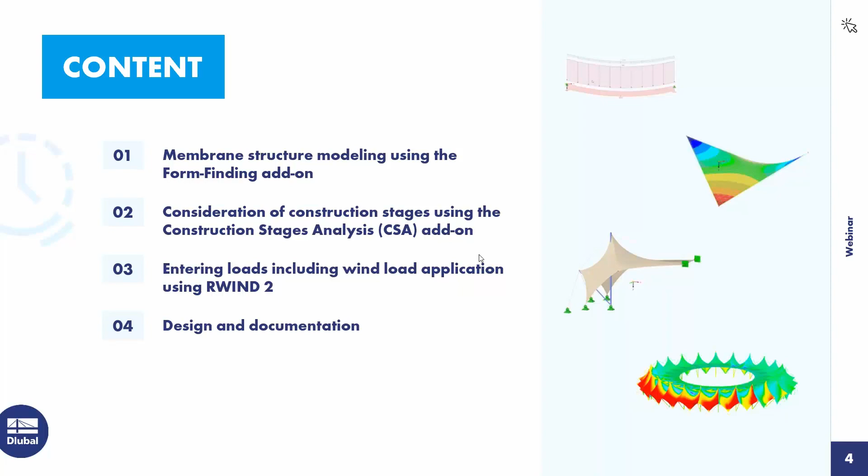Okay, thank you, Andreas. Then I take over and start with our webinar about the technical part. Today I want to show you how we can deal with membrane structures in our new generation of RFEM 6. For this we planned 4 main points we want to show you. At first, of course, how you can model form-found shapes and work with them in the program. Then how we can organize these shapes to each other with stages. And as third, how we can create wind loads according to a CFD analysis on the structure. And finally, how you can design and document such type of structures.

Of course, I can't do this completely for one project in 1 hour, but I want to give you an idea how this is working. And you see on the right side some pictures from top to the bottom. Because the new generation has a new input concept for these tools, I want to explain this to you on an easy, simple example on a cable at first. Then we go to a hypar surface structure, and afterwards we use all these functions I explained on a more complex structure for such a stadium segment, and finally we take care about wind simulation on the complete stadium model, what you see on the bottom.

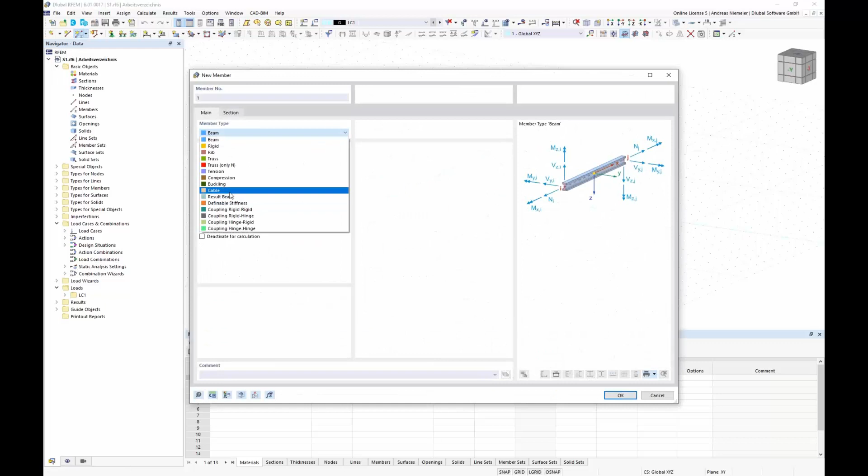I use a new member type cable with a cable cross section. Let's select one from the library, for example, this PE cable with a PE cable material with the equivalent stiffness, and define here a cable with the length of 10 meters between 2 points. So that the cable will not fly through the air, of course we have to define some boundary conditions, therefore I define here 2 supports. Now, this is the input for the model. As you see, a simple cable, and on this structure we explain now all features.

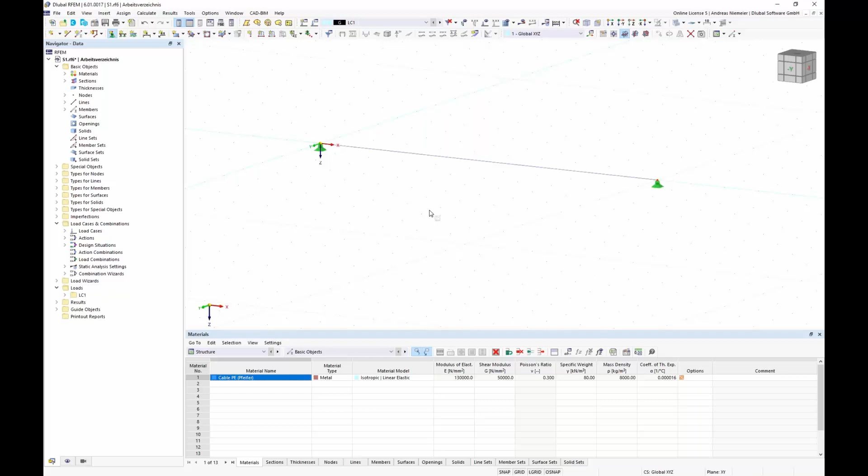And of course what I always do when I explain form finding, I calculate the deflection of this easy example. Therefore, let's calculate the self-weight load case, which is always defined automatically in our program. If we run the analysis of this load case, we will get from the program, as expected, a deflection curve. Here you see 66 millimeters sag. Of course we can scale the deformation manually. We can animate it, and of course when I scale it to 1, you will see that the deflection curve will lie on the topology shape.

And this is maybe the first point I want to mention. Here in our new generation we have programmed an intelligence that draws the topology, so the cable structure in this case, on the deformed shape, in this case with a sag of 66 millimeters.

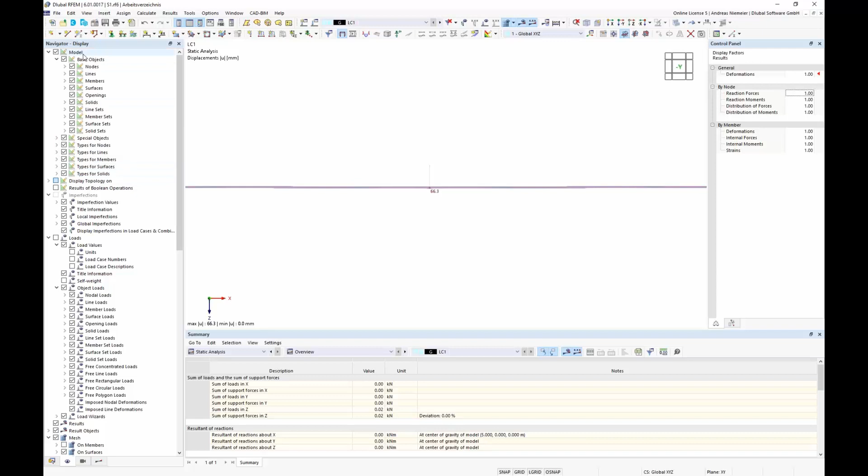This you can change in the display navigator below the chapter model: display topology on original shape and deformed shape. The same you can change here with this button, original and deformed shape. So this is a little change that should help to understand the model a little bit better. So, then let's go to the next topic.

Of course we calculated now the static analysis with the length of a cable of 10 meters and for the self-weight of the cable itself, which ended up in a 66 millimeter deflection with an internal force here of 0.33 kilonewtons. But of course it's too small a cable, one moment.

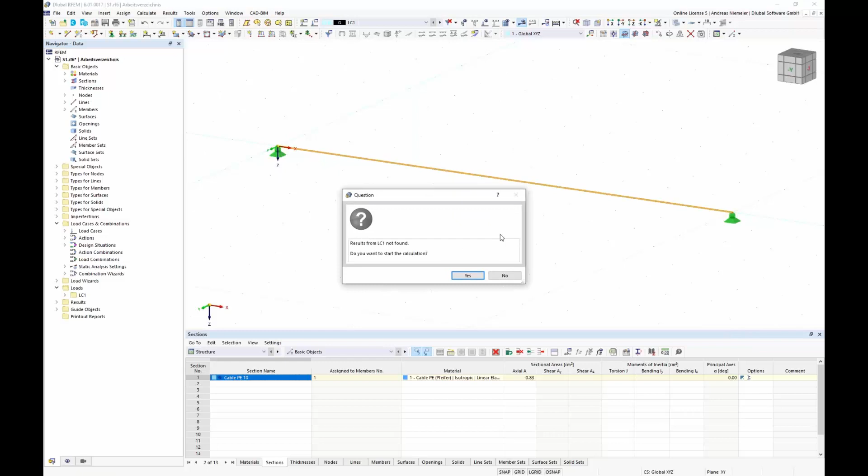Let's make it bigger now, because to show you the effects, I expect a bigger force here. Yes, 1.25. But of course, if you see the force here, you could say, I want to simulate in the program a cable with a longer length, so that I can reduce the normal axial force here. And this is possible with our form finding application.

For this, you have to define now, besides the self-weight load case, a pre-stress load case. I call it P and define here an action category pre-stress. This is now the step in our form finding tools. This pre-stress load case is now empty and should be filled with some boundary conditions, and we can fill it with the boundary condition for form finding.

We can go to the member loads, to load type form finding, and define here, for example, a geometric definition that we expect for a specific load a sag or a cable length of, let's say, 0.2 meters. And if we apply this load, you will see it looks like a line load, and it indicates that we get here 0.2 meter sag. And of course everybody could think now, it's defined, and if I calculate this load case, we get a sag of 0.2 meters.

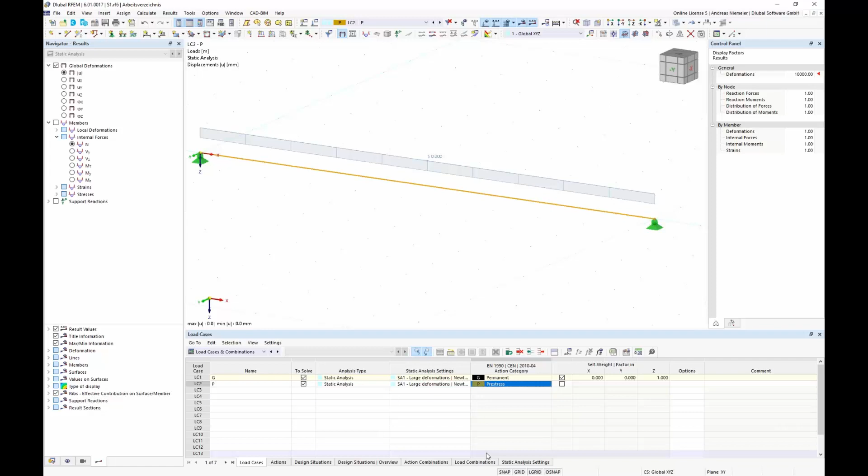In this case, if I take a look at the load case list, we can say, please find me the shape with 20 centimeters for the self weight, for example. It could be any other load also. But for this load, I have to go to the load combinations and define it. For this, I deactivated first the wizard and go to the load combination and say, please combine form finding with self weight. This means for the program, because combination 1 contains this form finding pre-stress load case and another load case, that this is a form finding job.

If we run this analysis, the program searches a shape which fits the conditions. It searches a shape where it can almost fulfill this condition of 20 centimeters with a corresponding force. Of course, you see here we don't meet the target completely. We have 213 millimeters and not 200, but this is a cause of accuracy. It's maybe the standard definition for a specific size of model. If you want a more certain result, you can change the properties of the calculation.

This leads me to the next feature, how this is organized in RFEM 6. We changed to the properties, and you saw we calculated CO1, and every load situation, load combinations and load cases, have a static analysis setting. That means I can assign to every analysis or load situation a set of calculation parameters. And these calculation parameters also have a form finding sheet where I can define these settings. You see there are fewer inputs.

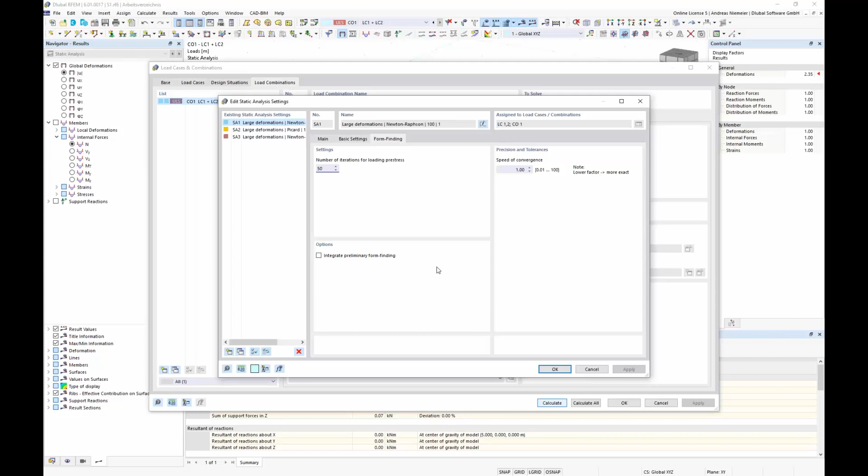We simplified everything a little bit, and I increase now the pre-stress loadings to 50, and after confirmation and rerun we will get the 20 centimeters hopefully, and yes, we get it. So you see the program found the shape with 20 centimeters with a corresponding force of 0.4 kilonewtons. So far this was our first form finding job in RFEM 6, and maybe you saw that we gave you as users a new mighty power in the program to work with shapes.

In difference to our old solution, we can now manage more shapes in one model, because I have it now in hand of combination. Before it was only one. And this means now, if you imagine, this is now shape 1, form finding 1 is G plus P, and you say, I want to check in my model also another shape. Maybe the shape should be based on a point load in the middle.

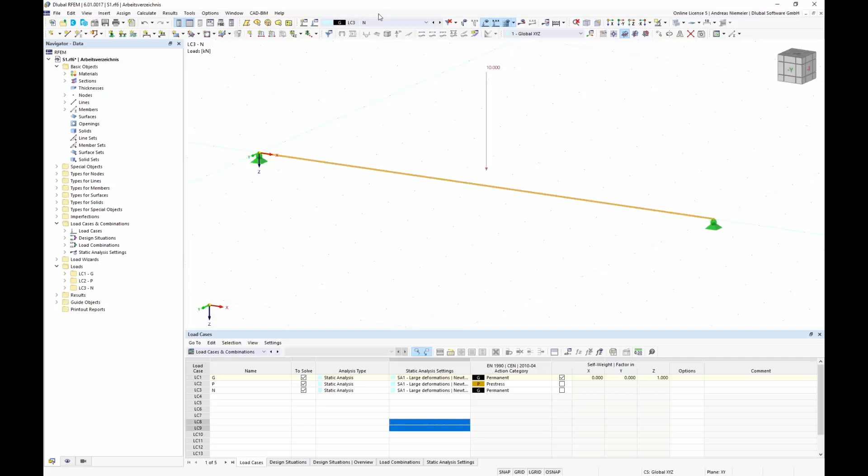So let's define here a load. For example, I call it N, and give this load case maybe the type permanent. And define in the middle here, let's say, a concentrated load with the size of 10 kilonewton in the middle of the beam, and place it here exactly. And now let's create a second parallel shape besides this self-weight based shape.

So I go again into this load cases and combinations dialog, into load combinations, and create here now a shape, maybe FF2, based on N plus P. And for this, we only have to change here the input, so P and N, in difference to the first one. And if we calculate this, you will see you can do in the same model another shape.

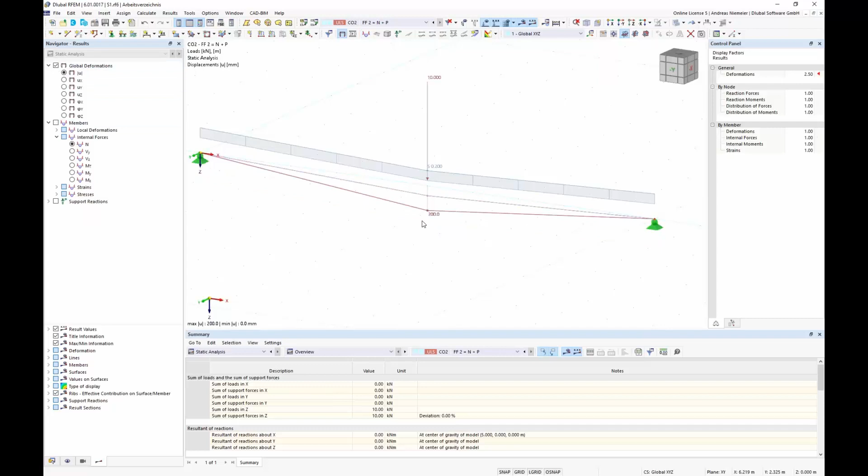That means we have the 200 millimeters in the middle, but if we take a closer look, you see according to this form finding load in the middle, this concentrated one, we get such a triangle shape with a corresponding force. And you can change in between both shapes. So this is now possible and gives you much more options to check your models or to create something new. So this is one point I wanted to show you.

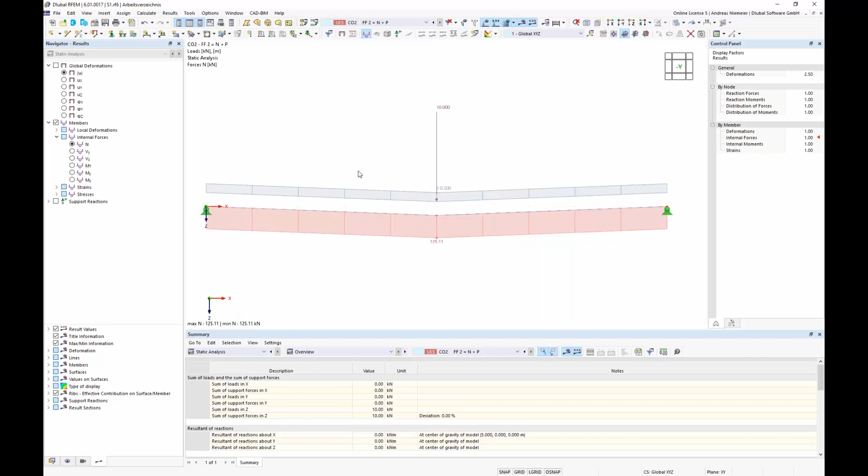So the next point was, and I remember many questions on the support, how I can deal with partial safety factors in the program. Do you have a solution for it? And with the new generation, we want to give you a solution. So I can say, of course, we can create a third shape. For example, I copy the first one and say, let's scale it up and define here 1.35 as factor,

and so that we have a clear name, 1.35G plus P. And if we calculate this, the program knows I have to do a form finding with the form finding condition of 20 centimeters. It was not scaled up, but with a bigger self-weight load scaled with 1.35, therefore we get a little bigger force on the cable, not 0.4 and 0.56. And you see the program is ready for this.

Of course we can also, let's say, scale the pre-stress. That means I scale the pre-stress 1.35, and only for the name here, 1.35 form 4, for example. This was form 3, only that we have a clear description, and calculate. Then we can also scale the form finding inputs. You see now 200 and 270. That is the factor 1.35 in between, with the corresponding force again. So it's an easy game to work with different shapes in one program now.

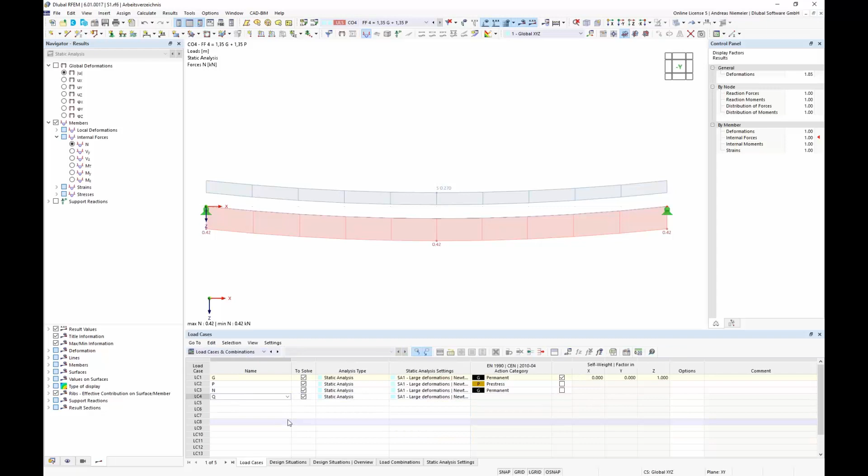And this brings me to the next topic. What happens if you want to use these defined shapes for further loadings, maybe self-weight, snow, whatever? And here it's interesting, you have to organize now which shape should be used for which load case. So define at first some additional load. I define here, for example, a variable load with any category. Let's take, for example, this red one. Now apply, for example, 5 kilonewton per meter on the structure here with a projected load.

So far we have a load on the structure. If I run this load, what happens? Without any further specification, the program applies this load on the 10 meter long cable, and not on any shape. But if you want to apply it maybe on shape 1, you have to assign it.

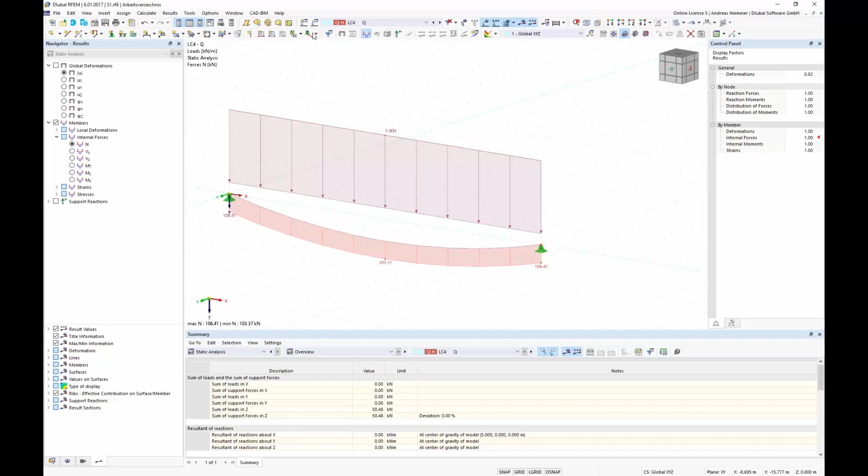This means we go again into this dialog, load combinations, and say please calculate. We give a name, Q on FF1. And this you can do if you define an initial condition or an initial state. So here you specify the shape, for example shape 1. This means we take over the geometry of the mesh and the inner forces, and to get a full set of calculation we apply also the outer loads.

Form finding loads and the expected, let's say, additional load. And now, according to the situation that we have here defined an initial state as starting shape, the program knows that this is no form finding job and only a pure static analysis job. And let's calculate this and take a look how this is looking.

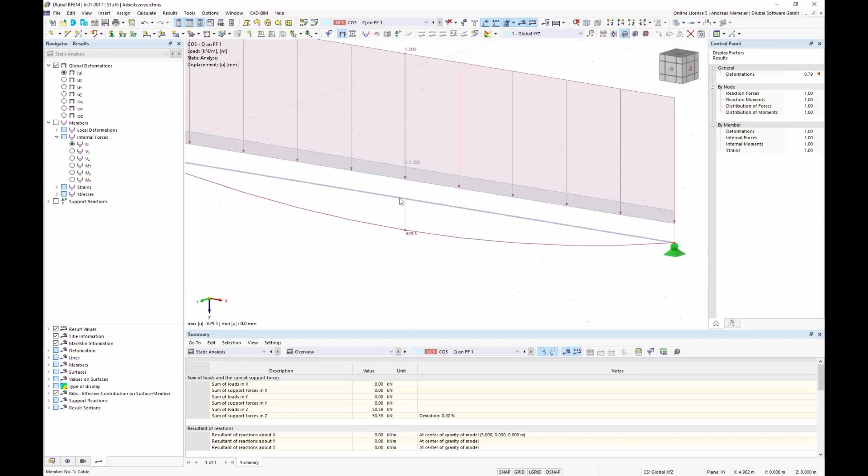And you see, when we take a look at deflection, we have now a deflection of 629 millimeters, and this means starting from the original shape. So this is what we inputted. This is the shape of the initial state. This is our form finding shape, and this deformed shape is the loaded form finding shape.

So the program gives you the option to manage all this stuff, and of course not only for one shape, and if you wish you can also apply the same load on shape 2, which means we only change here to shape 2 and exchange here the load. And with calculation we get the same task, only on, let's say, the original form finding shape 2 plus load, a deformed shape with 493 millimeters with a normal axial force of 177.

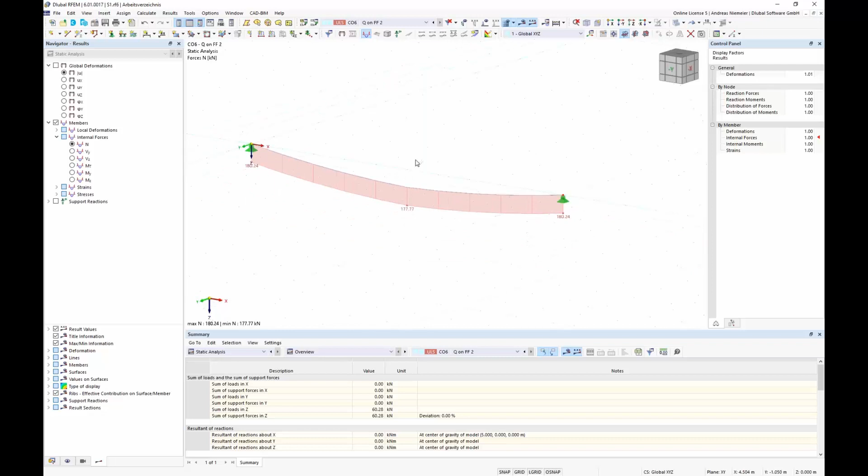So this is, let's say, our new philosophy of working with form finding tasks and organizing it in the program. And this brings me to the next point, how we recommend the standard use of these tools. If you are starting with a new project, of course you don't want to test it like I just showed you. On a real project I recommend, and for this we create here a new situation. So I delete all this stuff, go back to load cases, and let's remove this stuff.

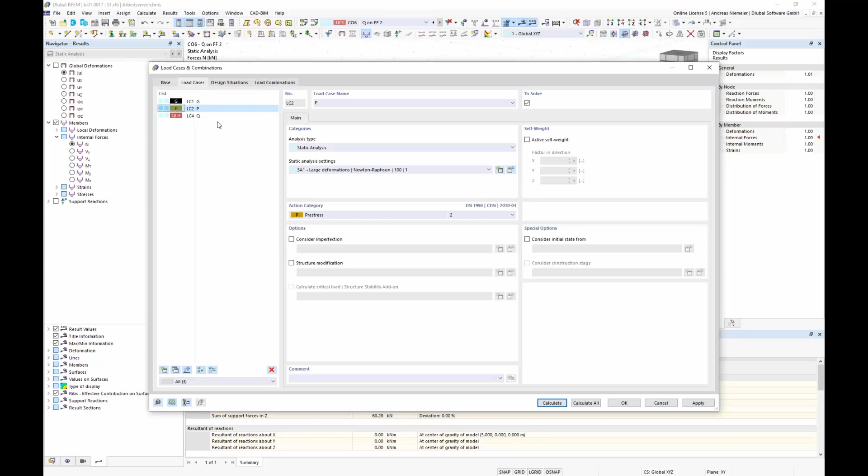And now we have these 3 load cases, a standard situation, and in a standard situation I recommend that you use the combination wizard and say please combine all these load combinations automatically. This means the program takes over all this stuff, but has to know what is my shape. And to define the shape for the program, we create it here as an individual load case. So we select both, for example P and G, add it, and say this load case is shape 1.

And now we give this shape 1 the pre-stress load case. Now you see we have 2 pre-stresses in it, and we only have to use 1. So I teach my action set, pre-stress, that the shape is not needed, we only want a combination with P, and go to the design situations and tell our combination wizard, if you combine something, please consider always shape 1 or any other shape. Of course we have to use Newton-Raphson here.

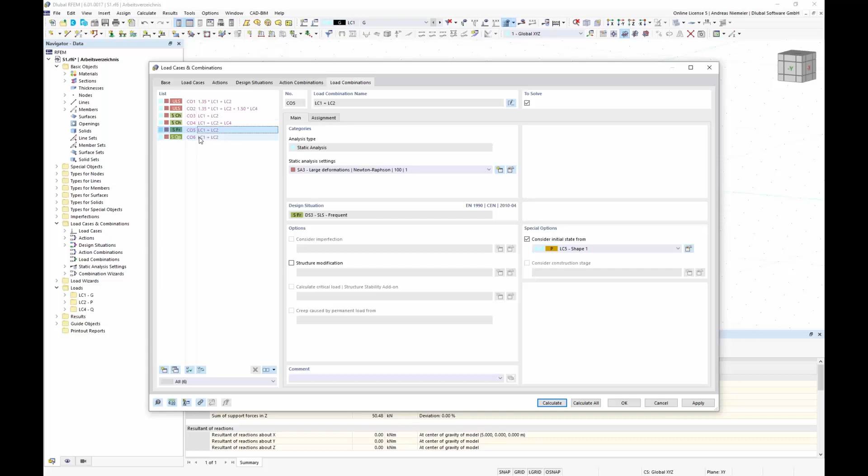So now if we go to load combinations, you will see the program combines for us all combinations according to the rules of the standard, so ULS and SLS with factors, without factors, and you see in all combinations the shape 1 is automatically assigned, and all load cases, the external loads, are also placed in the combinations. And with calculate all, you get all forces that are expected in this case. At first it calculates the shapes and then it sets them up.

So this is maybe the first introduction example that shows you how to work with all these tools in RFEM 6. Of course this is a special example because the shape for cables always depends on the form finding condition, so how big is the sag, for example, plus any load for which we have to detect the shape, the self-weight, for example. But there exist different examples.

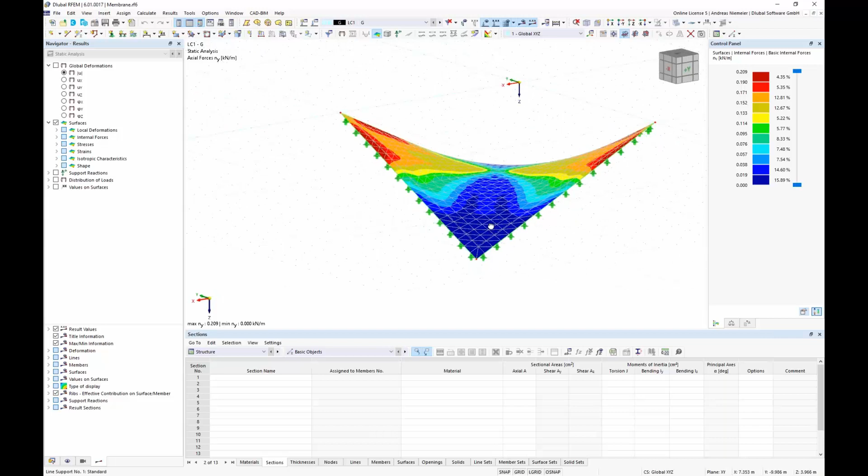Maybe the next is here, desktop, a surface structure, a membrane structure. And I prepared this example only to show you it could also work like this. So in this case we have such a sail with typical load cases, self-weight, pre-stress and snow load. For self-weight, clearly the weight coming from the material itself.

For pre-stress, we defined here, you see, the inner pre-stress, the membrane tension, by a surface load, like we just did for members, with load type form finding, and defined here in X and in Y 3 kilonewtons per meter. And you see, if you're running this form finding job, you get here the shape of the membrane, you get internal forces in the membrane which almost meet the defined 3 kilonewtons.

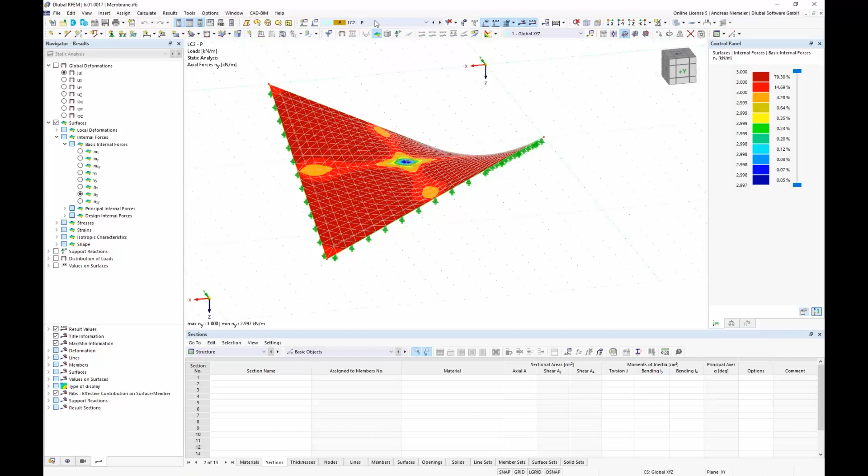And if you want to combine all these 3 load cases in combinations as the standard recommendation, you go into the load case and combination menu, define the combination wizard setting, which is on by default, and teach the wizard: please always assign the initial state, the shape from load case 2. Not more. In this case it's enough.

And if we go to load combinations, you see the program assigns even for this surface structure this shape from load case 2. And if we run the analysis, the program uses this shape and detects the forces. As you see, now if we go to the characteristic solution, we have here shape plus self-weight.

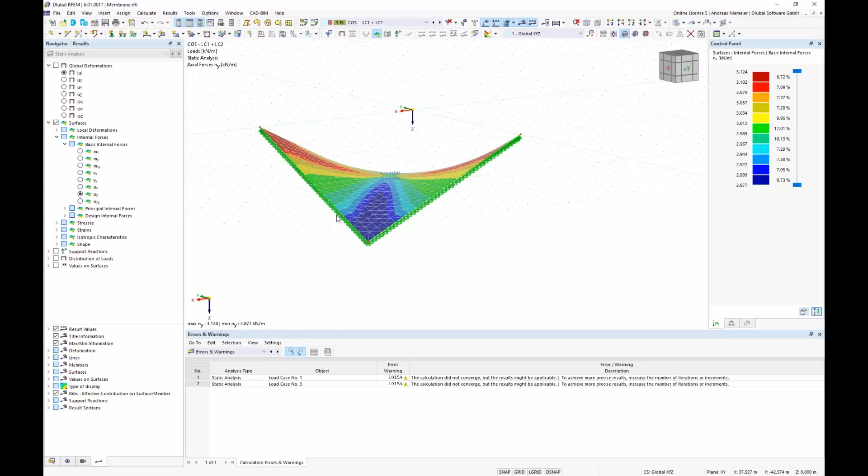It's not almost 3 because self-weight is applied afterwards, and if we apply maybe even the snow load, you see the forces have bigger changes because the load has an effect on the given shape. So even this type of model is possible in the new environment.

Now we learned that we can use pre-stress load cases with form finding loads to find shapes, to organize shapes, to assign shapes to load situations. I want to go the next step and say it's even possible to use shapes based on another shapes.

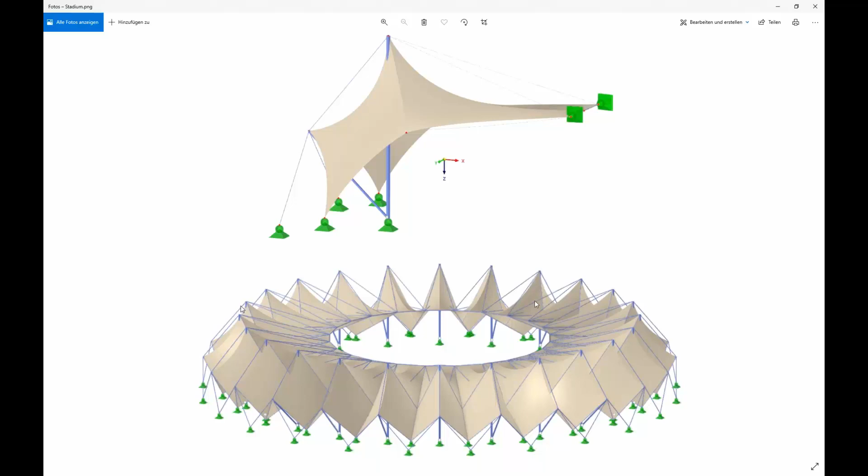So let's go back to RFEM. Open a new model, I call it S2, and define all tasks needed for modeling this part of the stadium.

I go to add-ons and say please use form finding. Because we have these different stages, primary and secondary, I activate construction stages and go in. Of course it exists, so overwrite it.

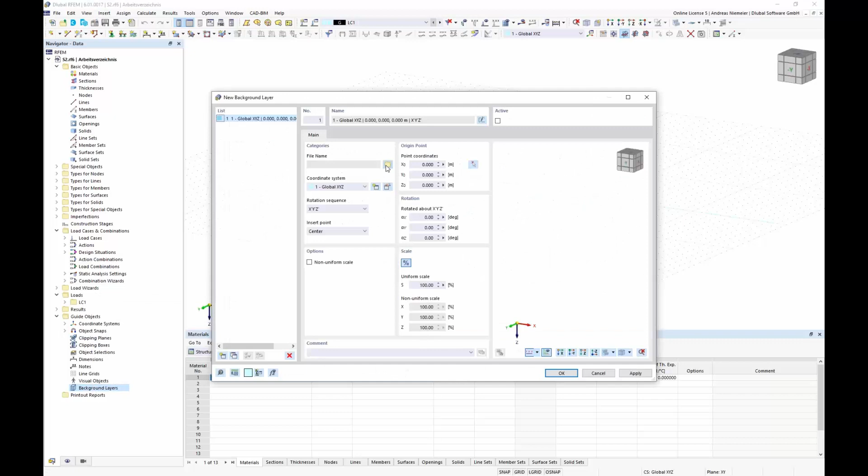Now let's start. Of course it's not easy to model a whole stadium or a fragment from it, so I prepared a DXF background layer. I go to background layers and import here a layer from a DXF file called base.

You see this is my DXF data. It's on the wrong plane, so I rotate it 90 degrees and then by 180, and then everything fits and we can take it over. Please take care that it's activated, so active.

Now we have this, let's say, basic geometry in our program. You see on the bottom there's a tribune only for imagination, and then you see here this main element is for primary structure, and then the membrane for the secondary structure. At first we model primary, take a look, and then we add the secondary part.

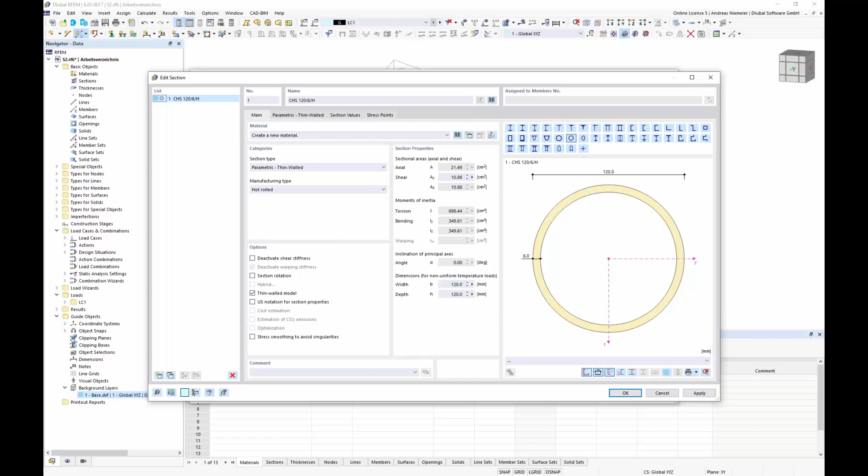So let's start modeling these members. I go to the member dialog, member type beam. Let's select a section. In my case here, because I don't move the section, my proposal is to the final state, but here I would select a diameter of, for example, 1000 millimeters with a thickness of 10, and a material of maybe S355.

So let's go to steel according to Eurocode. Select here standard according to Eurocode, this one, and select the steel here and go. Now we can place this column here in this structure, from the bottom to the top.

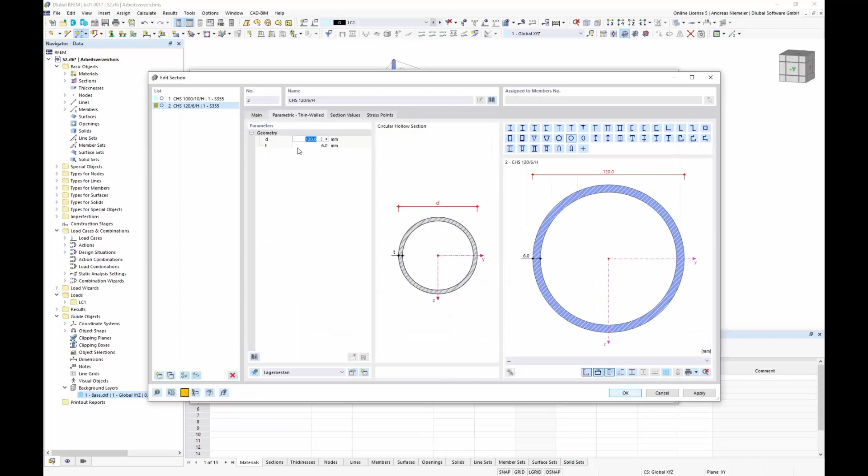And let's add here a bracing member that is connected hinged on the bottom, so if I activate the hinges, and here you have a different cross section, for example 600 millimeter diameter with a thickness of 10. Of course this could be optimized according to the section proof afterwards.

The hinges should be hinged on the bottom, so define here hinges about Y and Z, and now we can place here the member between these 2 points.

This structure will not be stable, so we have to use now stay cables on it. The stay cables are acting now on the outer fraction of this segment. At the moment it's only a slice, but it will be a 15-degree segment, so we have to create it.

For this we need a center point of our structure, so because I know here the diameter of the structure is 288 meters, I copy this node 144 meters to the middle.

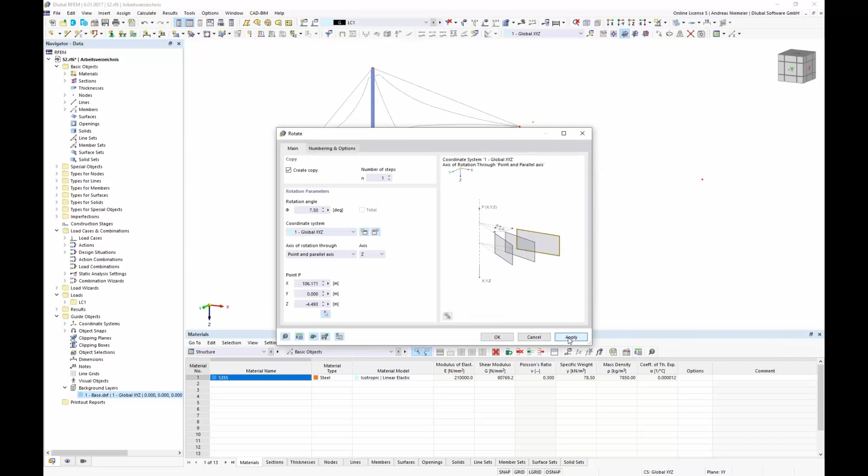And this is now my center for all rotations, and we can create from these nodes now the outer points for this segment. So I select these 3 nodes, rotate it by 7.5 degrees about the global z-axis around this point, and apply, and now minus 15 degrees and OK.

So now we get these outer nodes. When we take a top view, you see this is maybe the geometry of this 15-degree segment. And now we can place the cables, which means the uninteresting nodes we delete before.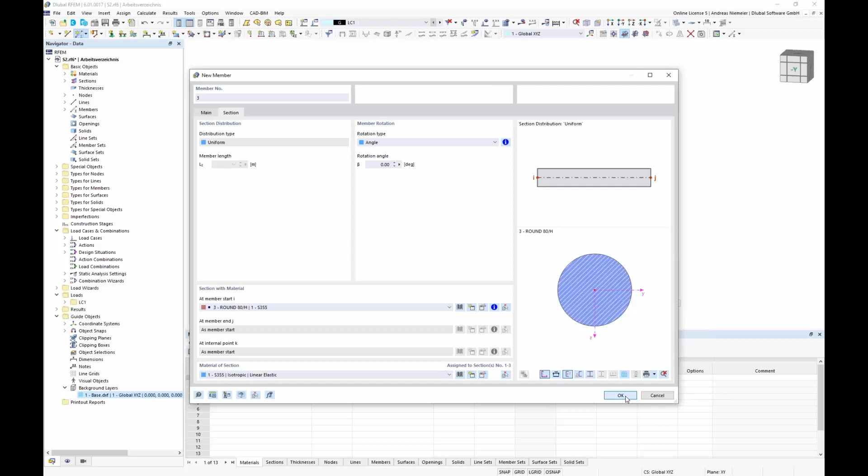Go to the new member function, use a cable, and select equivalent sections with an equivalent stiffness. For example, here a solid section with a diameter of 80. Now we can place it here and here, and now to the top.

Now we need maybe some suspension cables to the front. Here we have a different diameter, so it's a cable at least. We use here a solid section again with a 30 millimeter diameter, and then we can connect maybe the peak point or top point with the front points, and maybe make some stabilizing cables back to the back bracing.

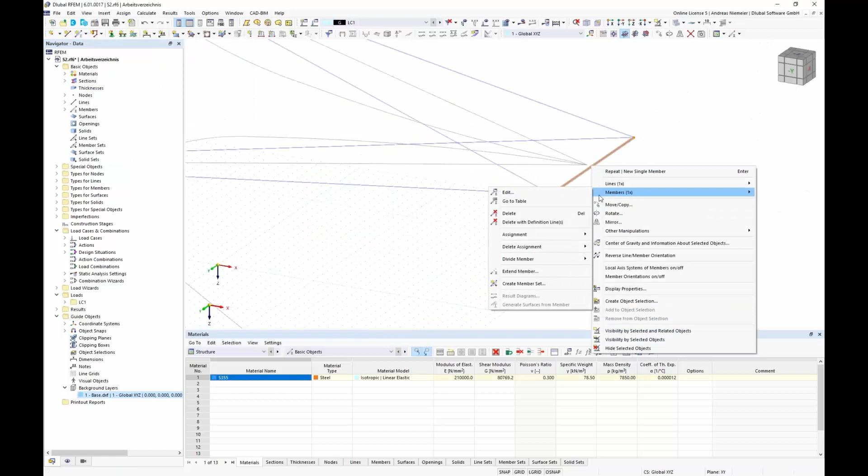So this is almost the primary structure for the stadium segment. The only thing missing is the tension ring around the structure. Let's add it. We take here a cable with a section, and maybe here need some more mass, for example 120 as equivalent section, and connect both points and directly define a middle point, so divide the member for a later connection of the ridge cable. So this is now everything I have to define for members for the primary state.

So I deactivate the DXF, so you see what is left, and now we have to define the boundary conditions. Boundary conditions, let's say the easiest ones, are supports. So we define here a fixation, fixation, fixation, and of course this front point is not weak. We need a rotational symmetric boundary condition so that this is overtaking loads.

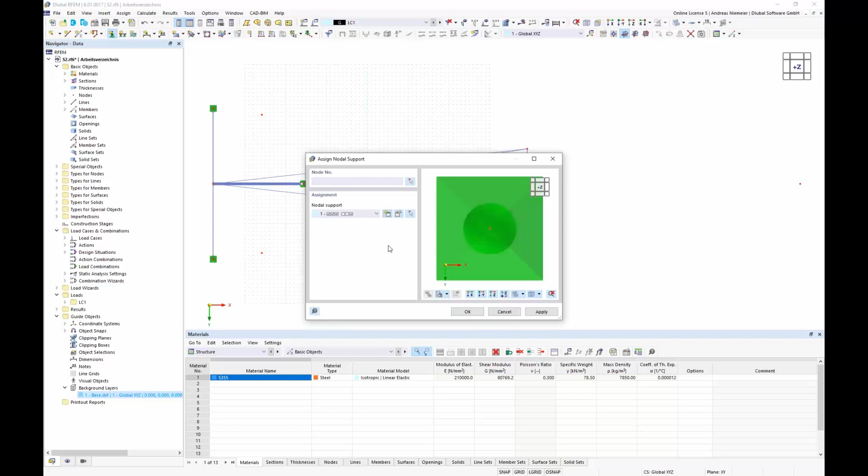So I have to simulate this tension ring around. For this I use also nodal supports, but I rotate it in the running direction of the cable, which means I fixate the degree of freedom in UY direction with a specific direction around 7.5 degrees.

Now let's copy it so that we have it also for the other direction with -7.5. And now we can start applying this support here, and the same for the last direction, and we get a structure that can simulate this tension ring.

So the structure itself is now ready. The only thing missing is the form finding conditions to find the right shape for this structure. And if we want to do something with form finding, we learned already we need a load case pre-stress. So this is G, permanent load case, and here we need a load case P, pre-stress, for defining these form finding conditions. So let's do it like this.

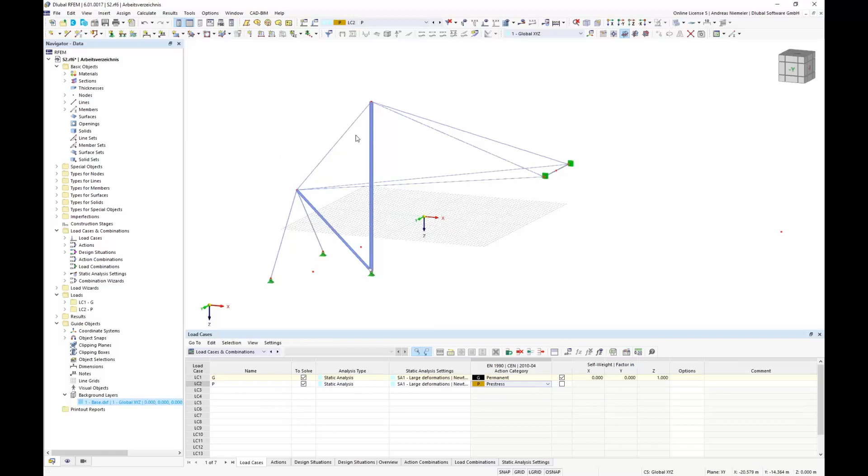This entry is done, and here define with member loads, type form finding, geometric definition. So you see we have different options: geometric definition, force condition, but in our case in this type I would say generally he should find a shape with the original length of the cable. So I define geometric length by 100% and apply this on all cables.

In the construction stages we can define now a stage, primary, or not primary, let's say shape 1, it's easier to understand, and we say shape 1 consists of members and nodal supports. The members, I draw a window about everything, okay, and the nodal supports the same.

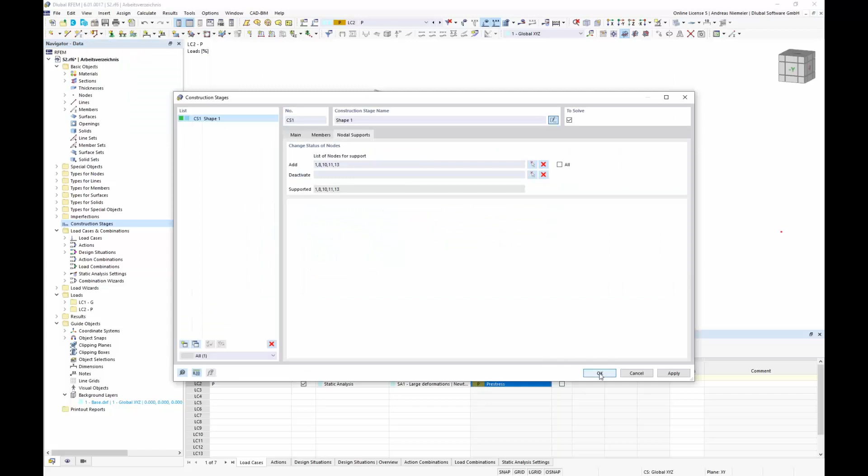Everything good so far. So the amount of elements is clarified in this stage, and the only thing missing is that the program knows he should do a form finding for this stage, shape 1. That means he should consider these load cases as permanent. And if we calculate this stage with this load selection, it's clear because nothing else is here, he can do a form finding for this type of structure.

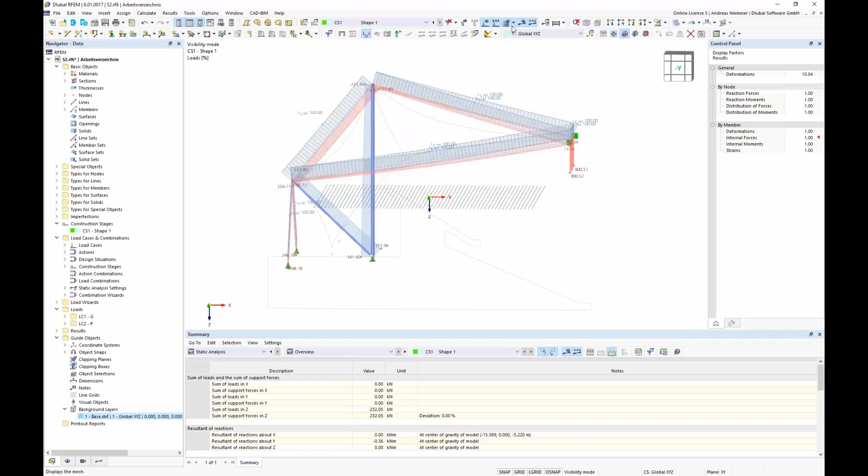We get small sags, we get forces, so everything is clear so far. The next point is to hang in the membrane, what I mentioned before. So if we take a look at the background layer and set it here, you see now we have to bring in the membrane on the already deflected and loaded shape 1. To do this, I delete the mesh and start modeling the rest. That means we define, for example, the boundaries of the membrane.

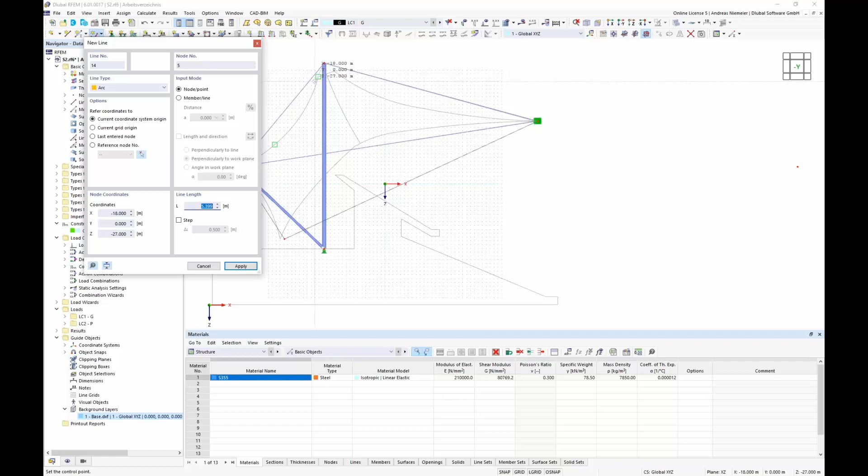I simplify this right now for the presentation and pick the line, same for this here. Of course it's not important if this line matches the DXF shape, because the form finding application itself will find the right place of the structure, so it's not a target, just a tendency of where it should go.

Now, not completely - we need a splice cable, so also define a splice, and if we want to define it on the perpendicular point, we can do like this. Now we can deactivate this shape.

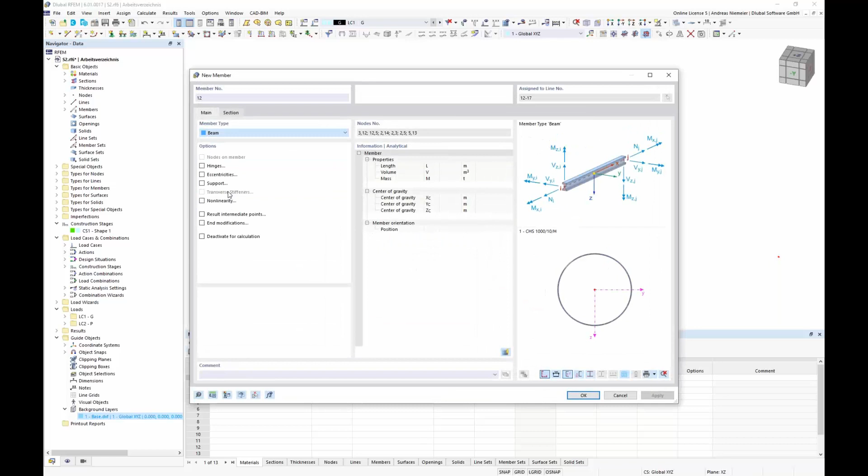You see we specified the boundaries for the membrane and can now support cables on these boundaries. So I select all these lines, go into the library, edit lines, and say these lines should hold some members with the type cable, and now define the last section, for example one with 20 millimeters.

So far it's good, and now we can bring in some membranes in these cable boundaries. Because this produces some non-plane surfaces, I select as initial shape a quadrangular surface with the type membrane, and go to the library. This is maybe new.

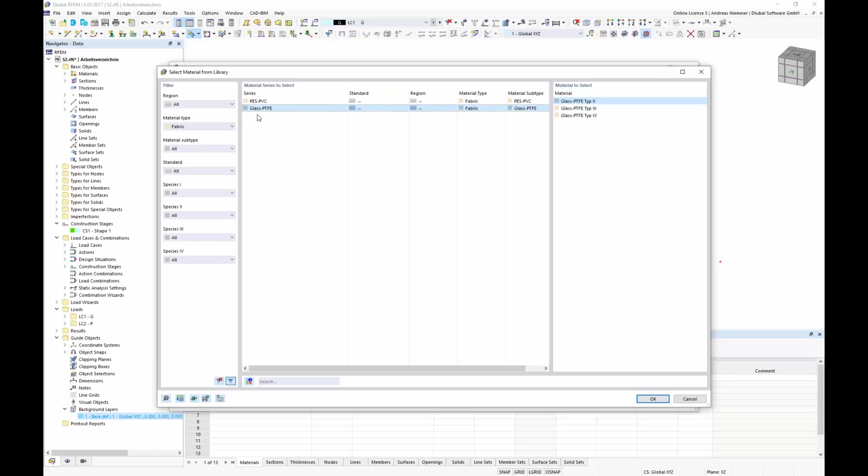In the library we defined fabric material, standard materials with an average set of stiffness values. For example, we use the glass PTFE type 3 option. The program knows, according to the defined stiffnesses, even the reference thickness of 1 millimeter here, and now we can place these surfaces in between these cable boundaries.

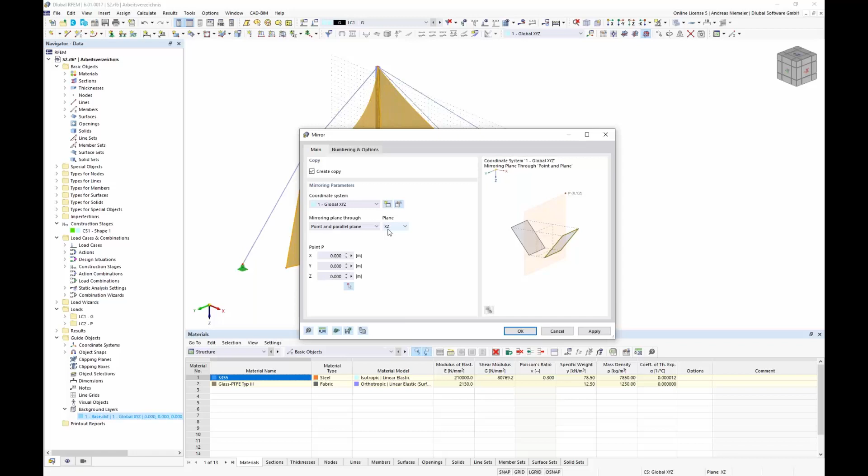If we take a look at the transparent view, you see the definition is now made, and now we only have to mirror this on the other side. So use the mirror function, create a copy about the XZ plane in the middle, and go.

So all this is done, and now to finalize everything we have to take care again about boundaries. One type of boundary is clear - we have to fixate these lower corners here, and we still have to check that the rotational symmetric support is working for this 15-degree segment. This means we have to support these boundary lines.

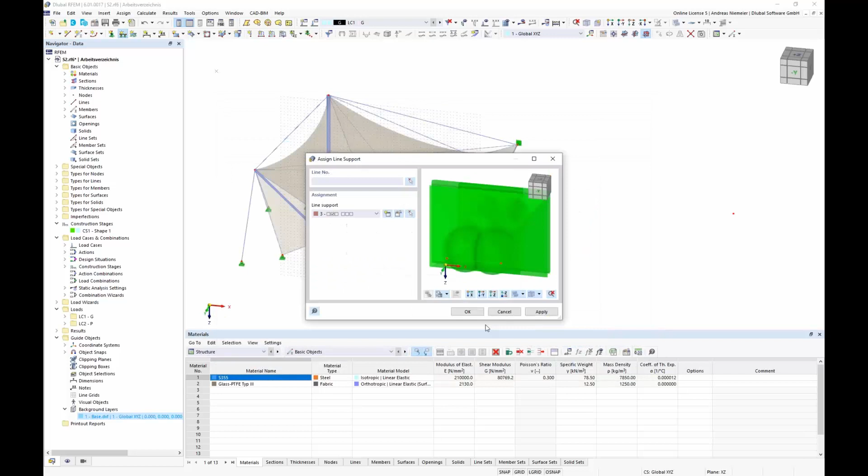So we use line support on a local axis in the local y direction, and pick these lines here. So far this is done.

This is, let's say, a fat green line. I don't like to see it all the time, therefore I deactivate it here with type for lines in the Display Navigator. And now the last point is to specify even form finding topics.

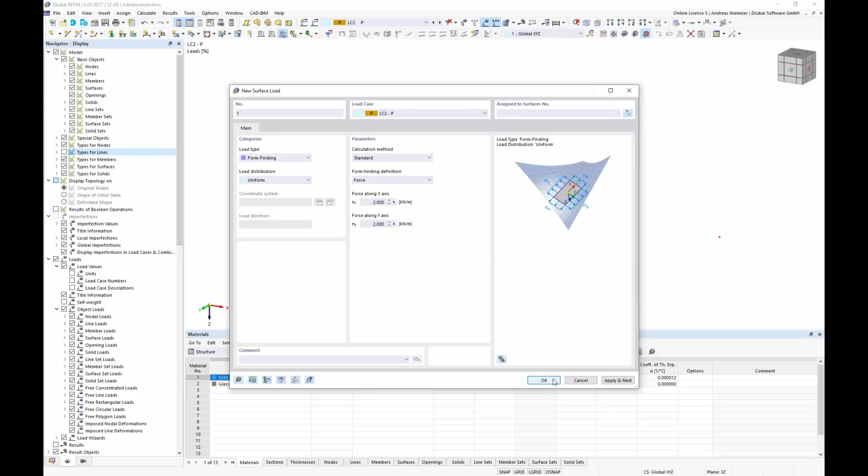So we want to pre-stress the membrane with a tension load. Let's go to surface load, type form finding, and we can define the method of application - standard or projection, force or stress - and we say, for example, we have 2 kilonewton in X and in Y direction, and draw it above the model.

This is done, and now only the last final boundary cables are missing, and now I see so many loads that I lost my overview. If you have the same situation, go to visibilities, generated members by section, and activate the last one, and you see these members are left, and we can go to member load.

Form finding, and we can select the definition. So geometric you already saw, but we also have force options, and here you get some more options for shapes. In RFEM 6 you now have the option to place an average force, maximum force, minimum force on member, horizontal tension component, a tension at start, at end, a minimum tension at start and end, or force density. So there are more options than in the old program.

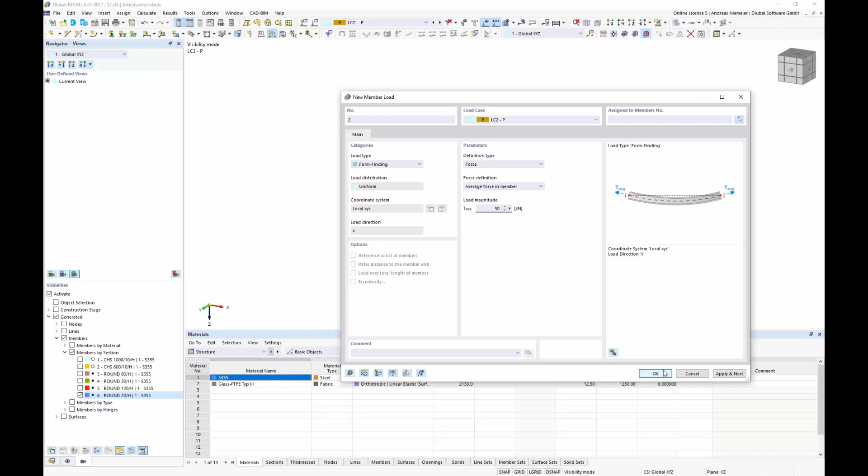We use now average force with, for example, 50 kilonewtons, and draw this over the structure, and you see the loads are set.

So now loads are defined, boundaries are defined. The only thing missing is that the program doesn't know what my secondary state is. So let's specify it in the stages and say, please create a new stage, and we call it shape 2 on shape 1.

And for this we say, okay, please consider also surfaces, please consider also line supports, and because we know no more elements will come, we say all, and all. So elements are clear.

So here we know which elements should be considered, and in the loads the program knows it automatically, because stage 1 consists of self weight and pre-stress, so it's a form finding topic because it's permanent. The same applies for the second because it's permanent. So if we calculate now stage 2, the program has to detect stage 1 first because it's the basis, and once it has stage 1 it calculates stage 2. So we have a sequence of shapes.

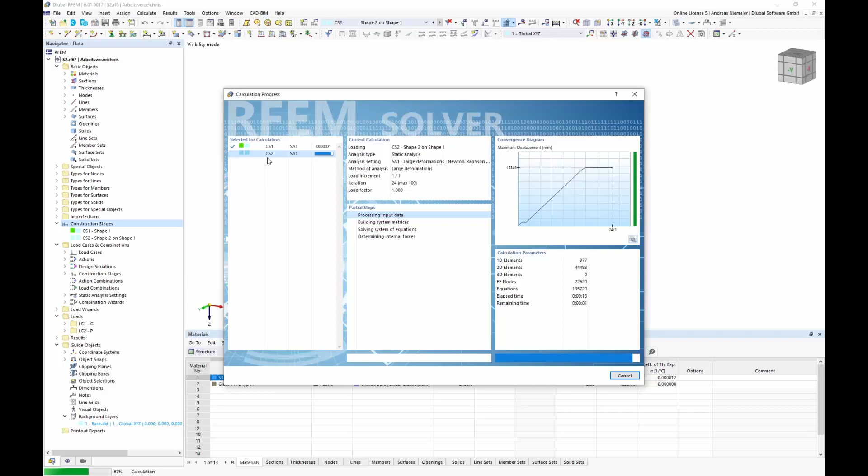This is quite a cool function, I would say, and gives us a really big potential to calculate a lot of structures. And you see now, when the update is ready, the shape of the membrane on the already defined shape 1 with a new set of forces.

Of course you see here the forces in the membrane, forces in cables, and you can change back to stage 1, which holds only the member structures, and you get only forces on these elements and not more. So there is a pure organization of which element should be considered and which load should be considered, and RFEM 6 has it open for your definition.

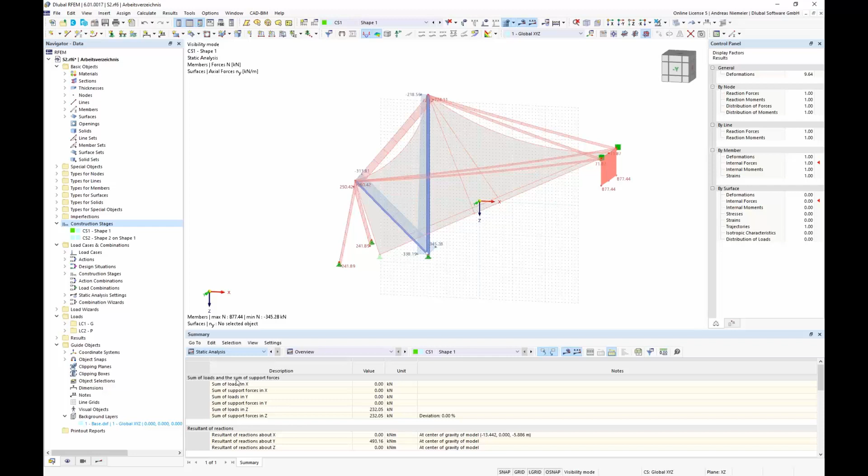And now if we have a sequence of shapes, the question will come up: how will I apply my additional loads? Is there not a weird situation or chaos? No, there isn't. So let's create a live load and define here in the load list, for example, a Q load, maybe this red one, and we apply it on the surfaces. So a surface load, force in projected area, maybe 0.2 kilonewtons. And we draw it over the structure, and you see it places the load above.

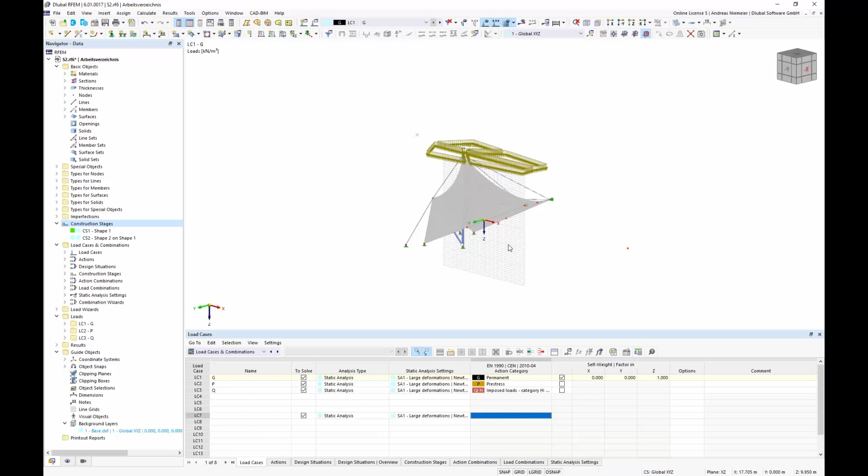The only question now is, at which stage should this load be used? We have to go back in the load combination menu to the stages and say, we have to do something first. We have to give the program information on what is the basis for further calculation. And for this we create a last final stage, and we call it structural calculation on shape 2. And for this we can now start assigning loads.

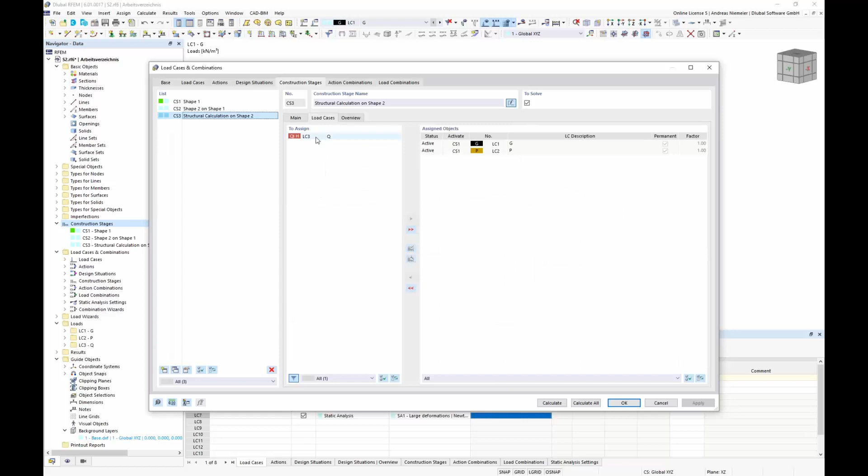This means shape 1 has a start condition, shape 2 is based on shape 1, and stage 3 is based on shape 2. And here we can say, please consider load case 3, variable non-permanent, in your stage. Now everything is done for calculation, and let's pick load combinations. The program prepares load combinations for ultimate limit state and for serviceability.

But if you take a closer look, initial states are not defined. So this is not so good. But it's the same as for load cases: the program has to know for which stage. So let's go back and say we want combinations for all stages. And the wizard says, yes, I do it for stages only with the Newton-Raphson solver.

And if we go back to load combinations, you see the list is a little bit longer, but now has a stage allocation: stage 1, stage 2, stage 3. Here we have 2 combinations, the same for the characteristic ones. And as you see, we have now defined stage 2 as the basis, working on the element set of stage 3. So even this setting is pre-filled with all load cases. Now we can start calculating all.

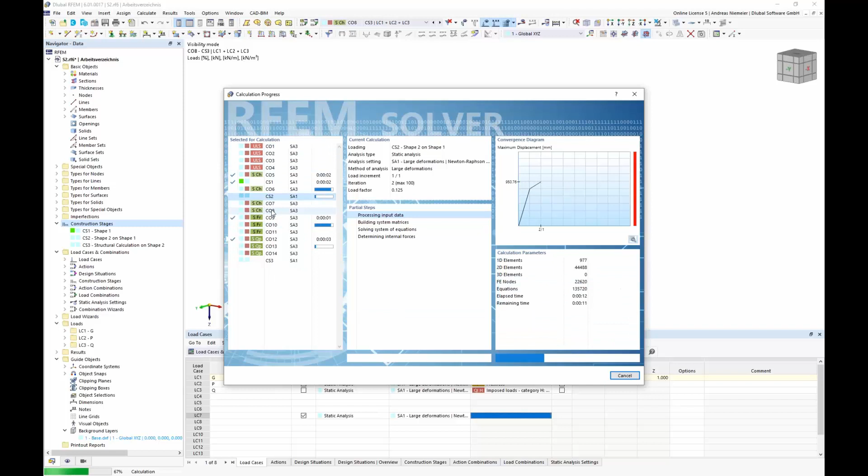Before that, let's deactivate these load cases so we don't have to wait for all, simplified a little bit. No, we can calculate all. Okay. So now the program is calculating all stages. The program always calculates the load combinations for the stages that are already calculated. So it can't calculate the final combination which is based on a state that is not prepared so far.

So now we have to wait to get the analysis of these 14 load situations based on different statical systems. As you see, there are always 4 processes running on my computer at the same time. This is connected to a solver manager, because the program has intelligence which searches how many processors are available and shares the calculation tasks among these processors, so it uses the complete available hardware. Of course, it cannot skip stages in this case.

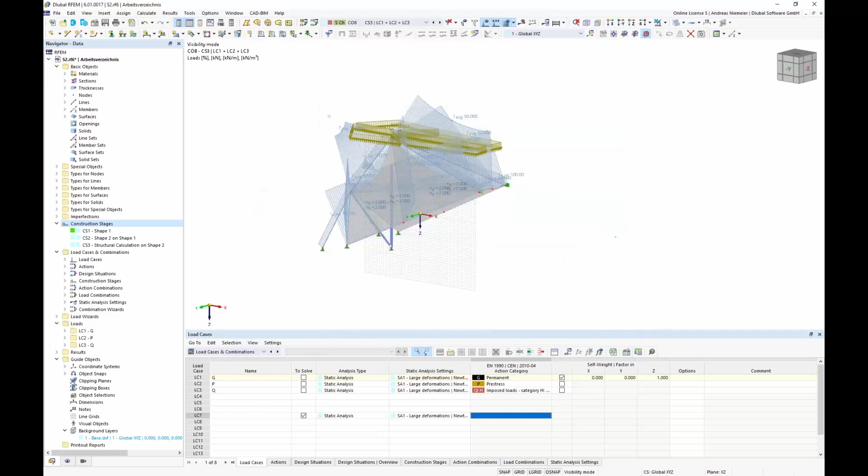So what you also can see: you can select here even every process manually. Maybe combination 1 has here a pretty small deflection, combination 2 has a bigger one because the membrane is moving from its original place to the uplifted place, which is a longer way in space to go.

So now results are ready. You see maybe nothing with so many loads, but what is clear, you see here, for example, let's open maybe combination 3, what is here self-weight and pre-stress in these different shapes. So this is maybe a little bit scaled, but now you can even select the different stages with the different situations.

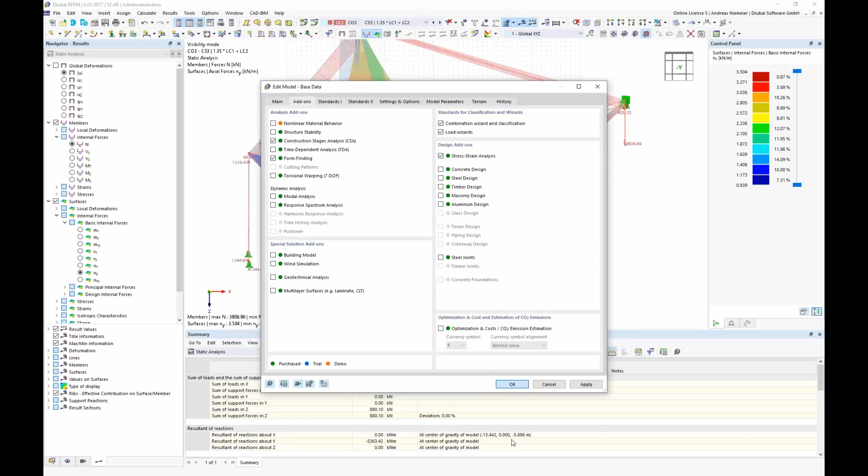No? And this brings us to how I can check if the membrane and members are so far okay. For this you can activate in the calculation add-ons the option, for example, stress-strain analysis, and with activation of the stress-strain analysis you get in your table the option stress-strain where you can say what should be calculated.

For example, for members you can select between all these stress components. It's endless and I think also boring. So from my point of view, sigma equivalent is enough, and check it against limit equivalent stress and apply. For surfaces you also have the same option. Equivalent stress is not so good here, but you can say please check sigma x and y with a user-defined stress, for example 35, and here for example 25. So it depends on you what the limit stress is.

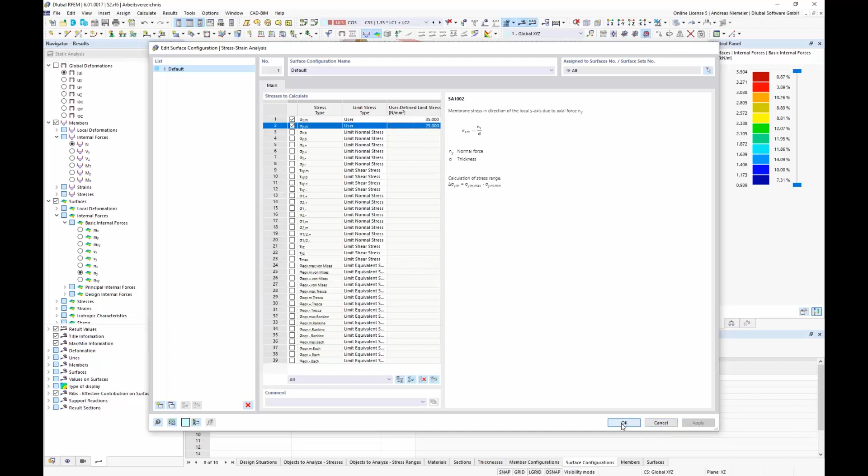And now if you run it, you get a utilization check for all these elements according to stresses coming from all these stages. So now we get a result. Of course now the nice form-found shape disappears because this is valid for all load combinations from different stages, so the program draws it on the original shape. But this is one point. Now you see we get results for members and for surfaces.

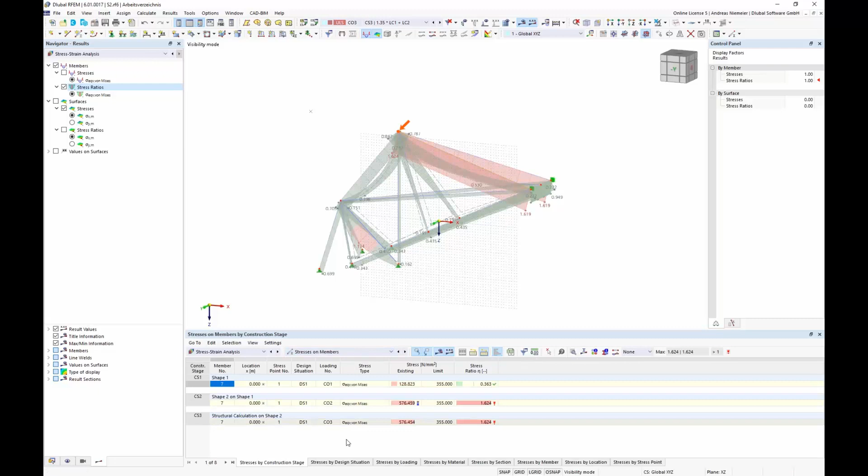So let's deactivate it first for surfaces, and here, for example, stress ratios, hide the mesh, make maybe a wireframe model, and you see okay, almost all cables fit, the rest we have to rework. Here we have some red ones, so you need a bigger cross section. This can be visualized, and you also get a result table: stresses on members by stages, by design situation, or by section. This one is maybe the limit state for the different cross sections.

No? The same for surfaces. Here we have also utilization, and you see stresses on surfaces. So far the grid points are fine. Stresses by material, by thickness, by surface. You always get a table where the existing stress is compared with the limit and you get a check or not. So far.

Now you see this is the way of design, and if you have to bring all this calculation on paper, the program offers a printout report. This report can be opened here, and first you have to give a scope of what should be inside. Take a look, you get all options, basic objects, nodes, materials. All these topics can be brought in the shape of a table, even the stress analysis we activated.

And here you can say error warnings are not interesting for surfaces. I want to document the table surface by surface number, and save and show me these tables. Now the program creates a report where we get a sum-up of all input data according to the scope we just defined.

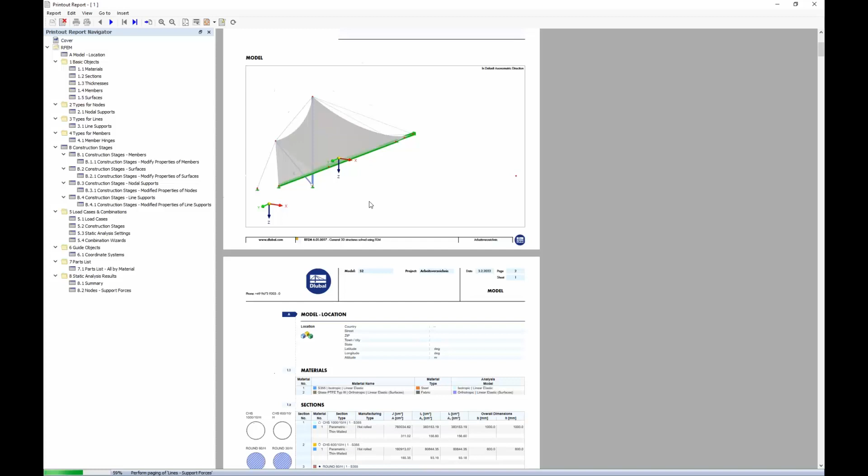It's a styled document with a cover, a content list, and all data like sections and members are visualized with nice small explaining pictures so the reader understands what is going on. You can zoom if needed, and of course the results we just looked at are included. So here's our list for cross sections and surfaces. Even the list we see in the main program can be shown in this document, and to make it more reader friendly, you can also add pictures.

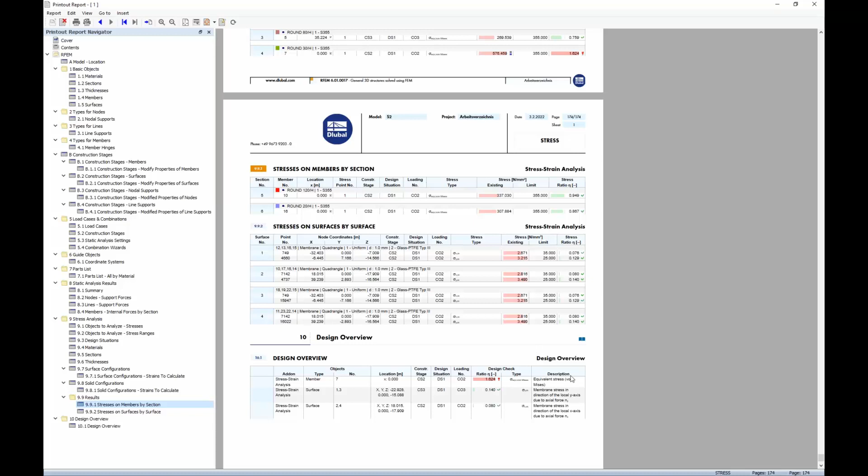So jump back. The menu is opened in parallel, and you can say, please print me a picture of the member utilizations into the printout report, and say here, please make me a window-filling picture with a height of 50% of the page height, and yeah.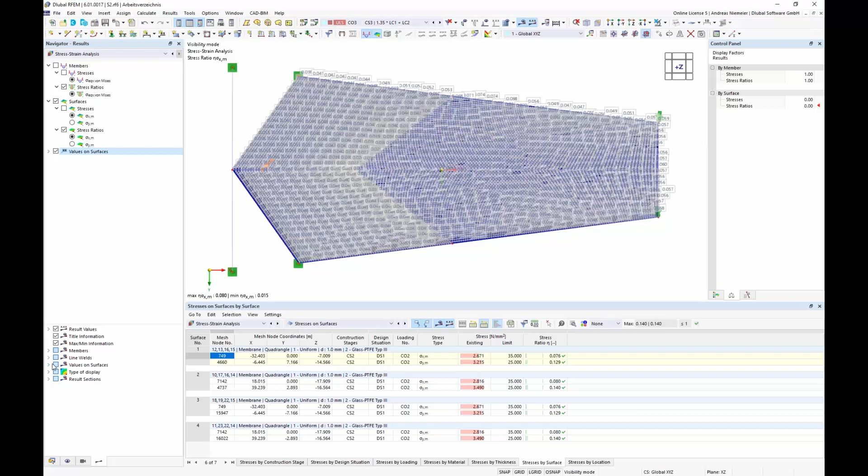Okay, and make me a utilization picture of the surface utilization from top view with values on surfaces with maybe extreme values. So everything is possible. You can create your own pictures as expected, and let's go to print and move it into reports. The same for the Y direction, and print, and if it fits we update the report.

So now the program is updated. You see the pictures are inserted in time, and the process is still running, and we can work with this document, and when it's updated it's regenerated and you have all these pictures inside. So this is not a big deal, to bring in some result pictures.

And what is not nice here, maybe the color scale is inside the picture and it's not so good, so you can go to properties and say please print color scale outside graphics, and the program is updating the pictures where the scale is outside.

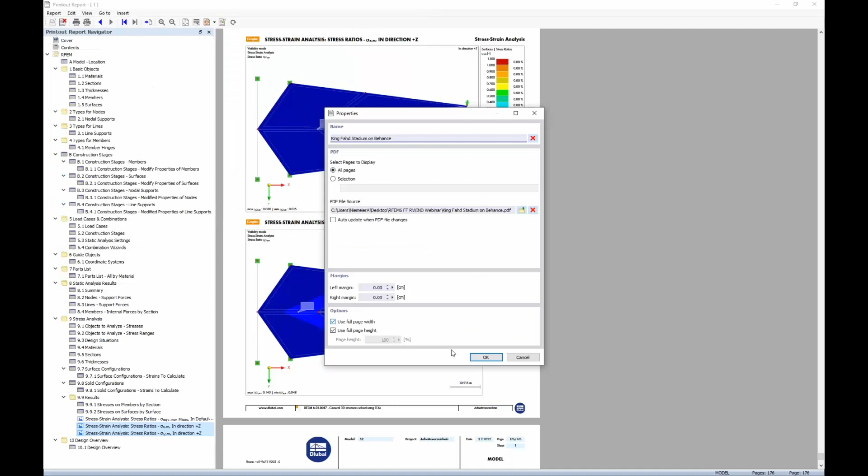So to round it up, finally you could be forced to make some description of your structure, and if you have some prepared PDFs or whatever, you can read it in. So go to insert PDF, go to, maybe I have here my folder for webinar. I have maybe a PDF of the website from Antonio Fesch about this stadium in Riyadh. We can bring it in by one click,

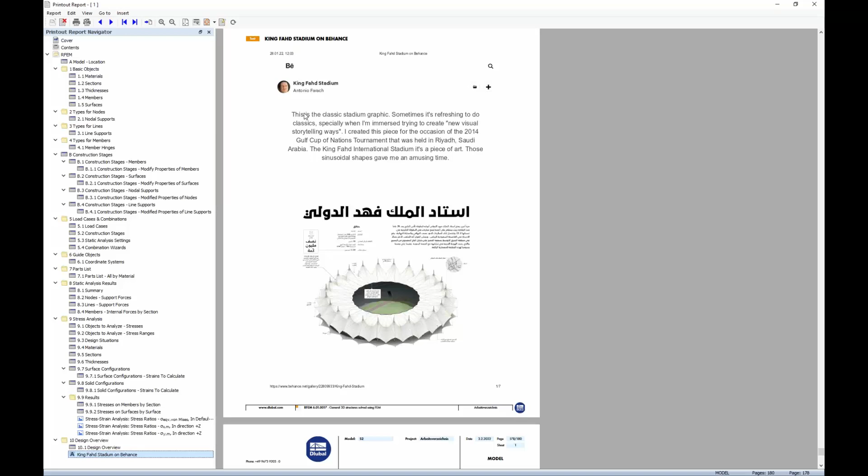and you have it here imported. It's not a bottleneck regarding performance, so you can also still work with this report and jump to different positions and create a final documentation for your clients. So maybe this was one workflow how to work with the program to create shapes based on other shapes.

And now maybe we can think about how to finalize all this analysis, and for this a look into the load case list is important, because we did now only basic checks on this small 15-degree segment, but to do a full analysis you also have to consider wind loads. And wind loads is, let's say, for this type of structure not so easy, because we have no concept how the load distribution looks, and therefore the question comes up how big the loads from wind are.

You can solve it by a real wind tunnel test, or what we can offer, you can place your structure in a numerical wind tunnel. And for this, you need a full model, not only a 15-degree segment. Therefore, you can say, please take this structure and rotate it, maybe here by 15 degrees around the center with 23 steps, and confirm this setting.

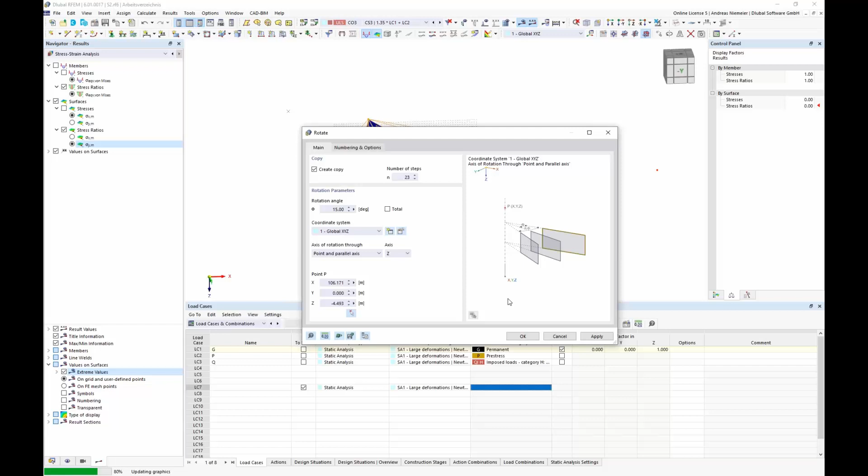And you will see that it's not a big deal to create such a big stadium model now, because if you have your system of your structure and you modeled it quite clearly, it's no big deal to combine it as a bigger model. Even the stages topic, all this is not so critical. And now if you have such a model, you can place it completely in a numerical wind tunnel.

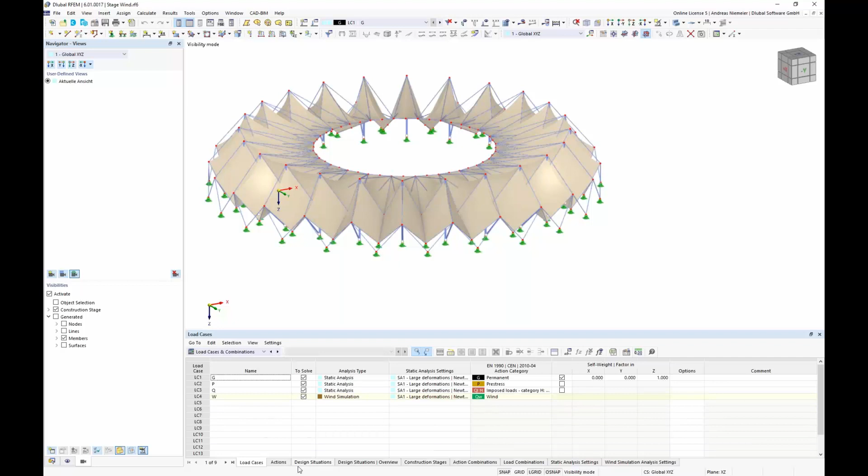And because this takes some calculation time, I prepared here a model for you. So I jump now into another RFEM and move it here on this side. So this is almost the same structure, even with these stages we just discussed. The main difference is that I created here a wind load case. And this wind load case, like you see in analysis type, has a different flag. And this different flag comes because in add-ons the wind simulation is also activated.

And if you activated the wind simulation, you get the option to define here in analysis type wind simulation. This opens two new registers here, and you can say, please use this model with this stage and this shape for a wind simulation in a numerical wind tunnel, where the wind medium is according to this density, kinematic viscosity, this turbulence model and meshing, with this wind profile, which could be user-defined in a table or according to any standards. And the wind is coming from this angular direction.

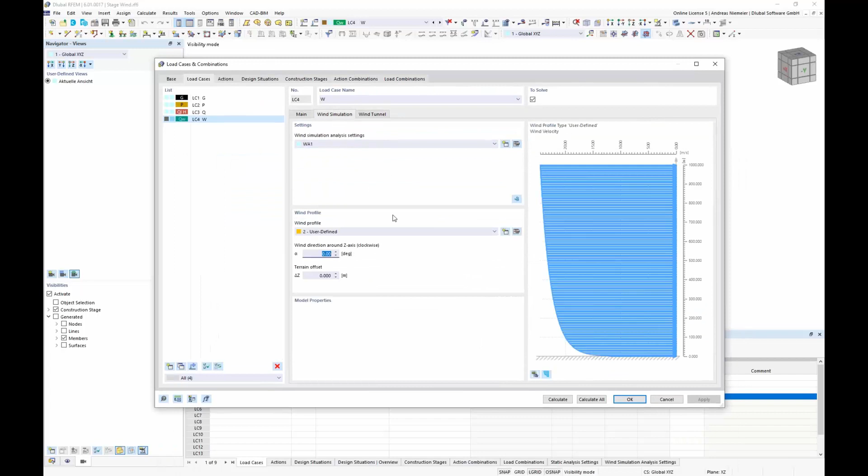So here you specify the medium around the model, the input wind speed, and the size of the wind tunnel. And if you calculate this load case, this is a two-step process, which means the program is moving the model in background into a numerical wind tunnel according to all defined settings, calculating the wind medium around the model.

Let's take a look. You see, calculating here, this is the numerical wind tunnel structure. You see the wind tunnel with input window, and now this process is detecting the pressure around the structure.

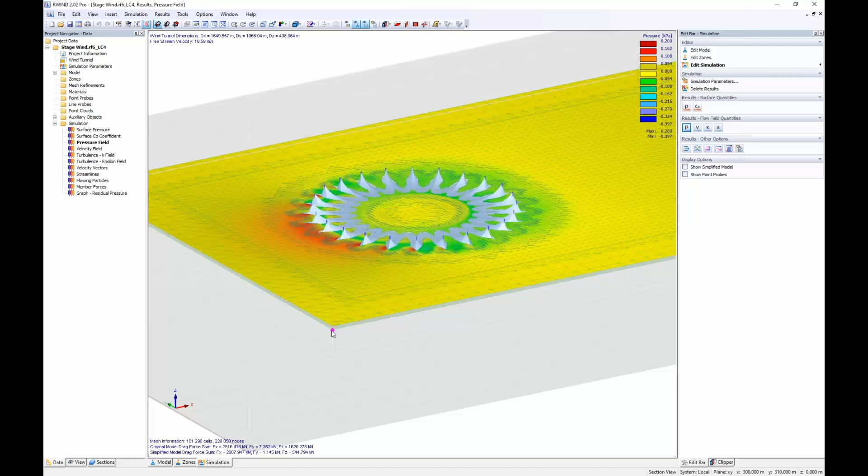Now this is only maybe a slice of it, but you can see how the pressure is changing. You can also say, please show me results in this slice. It calculates the wind velocity around the structure and even the wind's direction. So with this information, the wind flow for the structure could be, let's say, detected. And according to this information, the program can calculate the pressure on the structure.

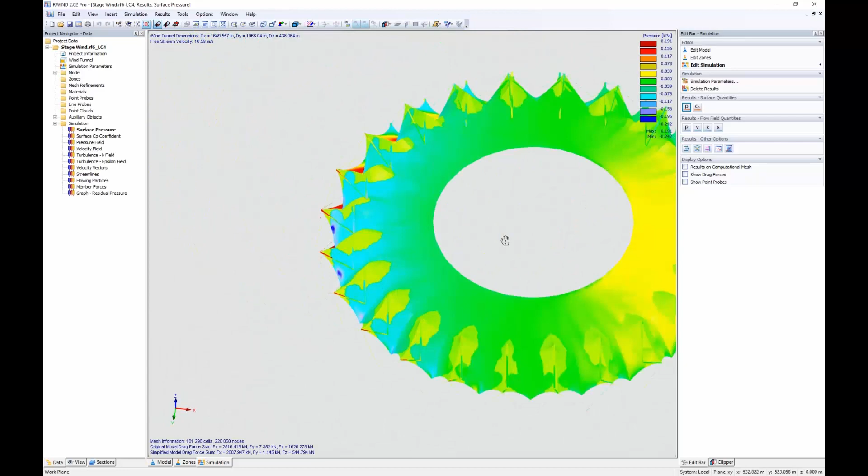You see, if it's updated, that we have here in front, of course, some pressure, here some suction or below, as you can see even in the back section. So all this influence is given, and these forces, these pressures are given back to RFEM, to this load case with wind analysis, and are used for a subsequent static analysis.

And this is a two-step calculation, as I just mentioned, and leads to the situation that you can, it's running, detect for these forces new internal forces in this structure. Now it's ready, and you see if I activate the loads, this is maybe the wind tunnel. If we show everything, you see this is the input wind speed like we just saw for 0 degrees in X.

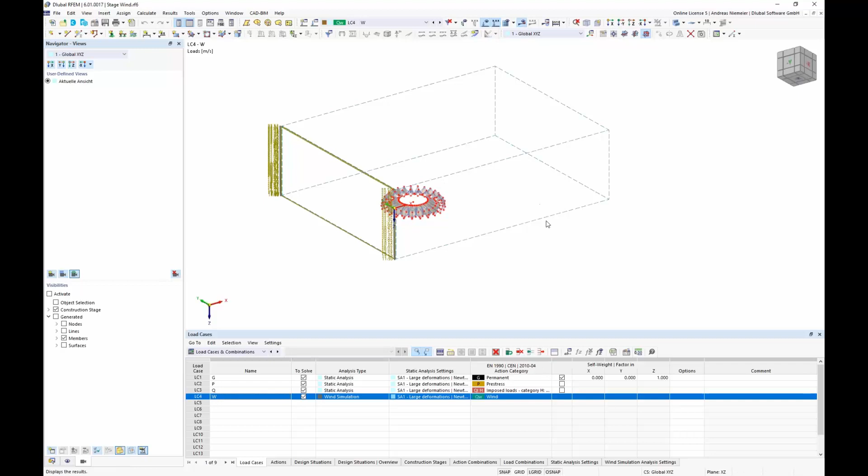And now if I activate forces, you see this is now the structure's answer to the wind simulation with the loads the wind simulation calculated on the structure. Here we have, for example, the internal forces, normal axial forces. Maybe I rotate it, yeah, exactly. And we even get deflections on the structure.

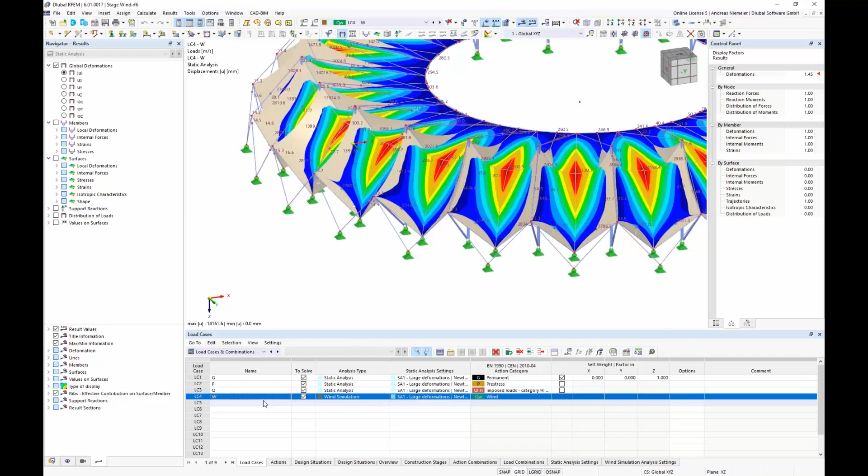All this feedback of the structure is now given according to these loads, and now with this information and this real load distribution of wind load, you can go ahead like I showed you before. You can start combination of these loads, calculate loads for ultimate limit state and serviceability state, and feed them into the design add-ons, for example stress-strain or steel design, as you have to do according to the rules for buildings. And this brings me to the end of my webinar, and I give back to Andreas.